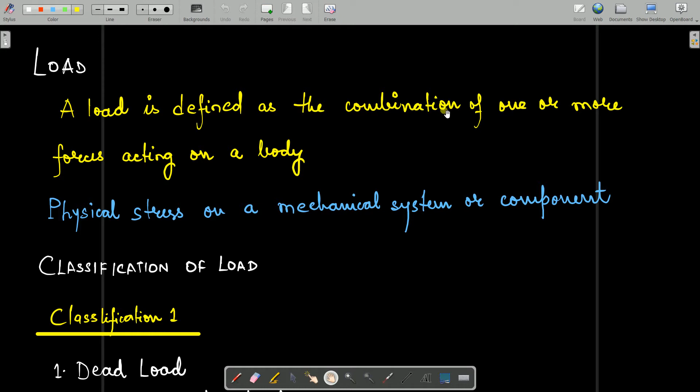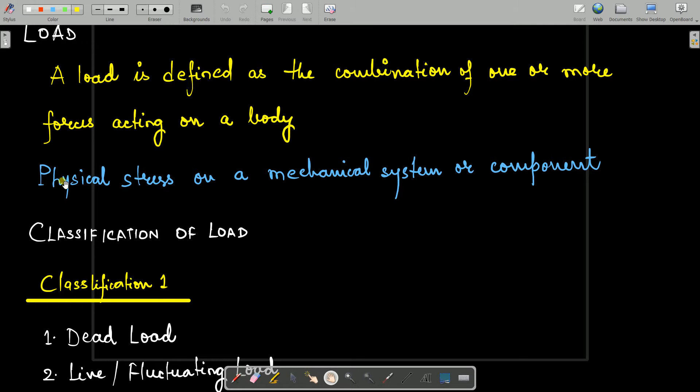Now we'll see what a load is. You can define load as the combination of one or more forces acting on a body. Or in a more trivial sense, a load is nothing but a physical stress on a mechanical system or component. This physical stress is the result of an external force that you're applying on the body.

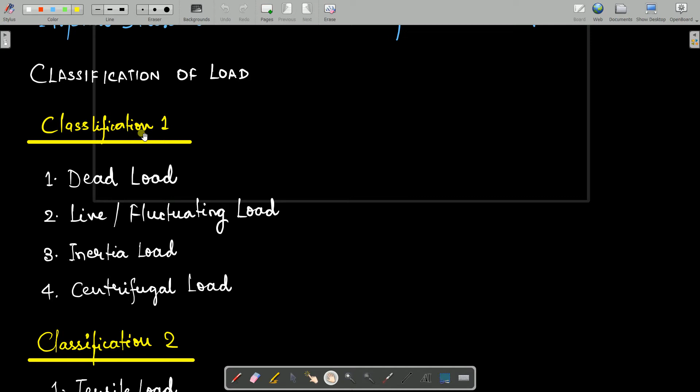Now, classification of load. We can classify load in different ways. The first type of classification is dead load, live or fluctuating load, inertia load, and centrifugal load. What is dead load? Dead load is a load which is stationary, which has got no disturbance. Simply, a load is kept - an external force is being applied and it is left.

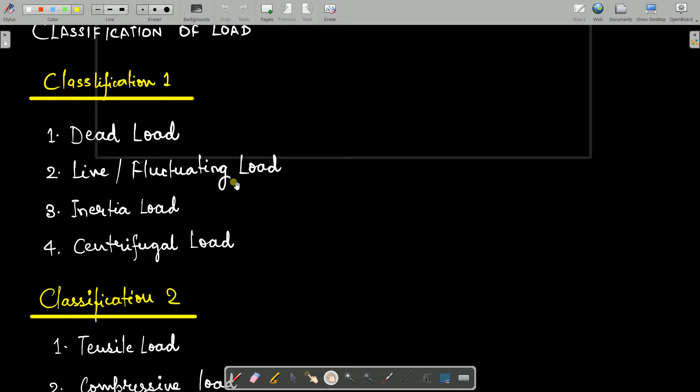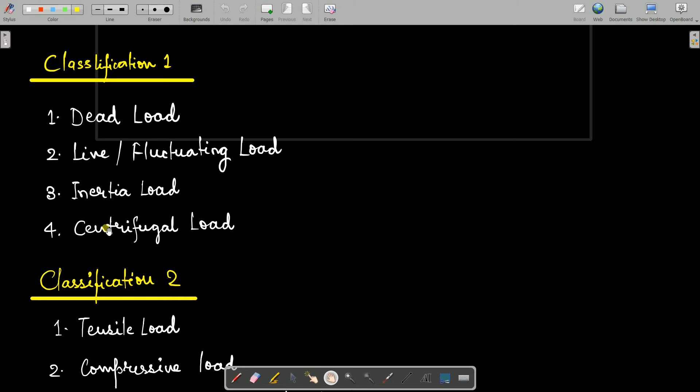Then we have live or fluctuating load. Continuously there are some changes in the magnitude of the load, just like someone hammering something, or some vibrations - those types of loads are called live or fluctuating load. Then we have inertia load, which arises due to inertia. And load arising due to centrifugal force is called centrifugal load. So these four types of load come under classification 1.

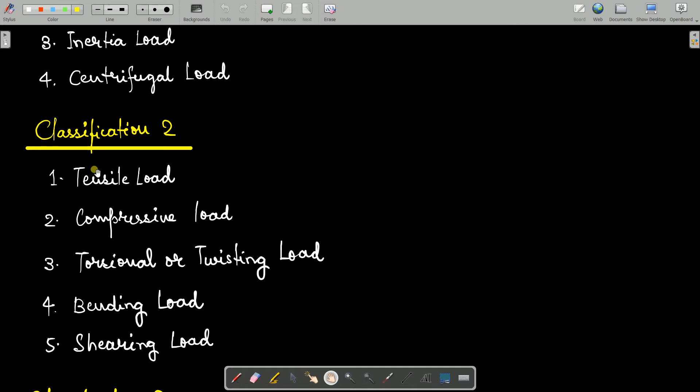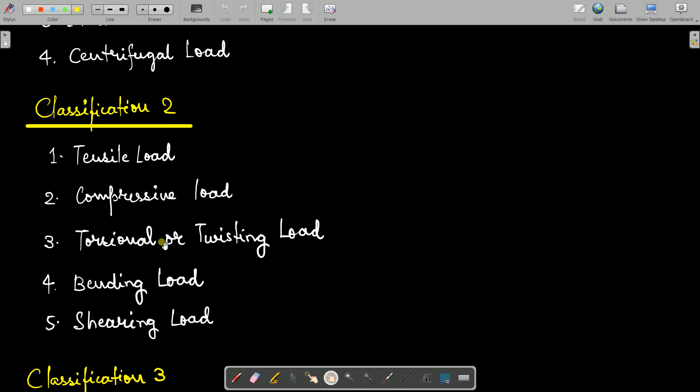Another type of classification: we can classify load as tensile load. Just like if you are pulling anything, when the pulling nature comes into picture, that load is called tensile load. Whenever you are compressing anything, that load is called compressive load. When you are twisting anything, applying some torsion, that is called torsional or twisting load. When you are bending anything, that is called bending load. And when you are shearing anything, we call that shearing load.

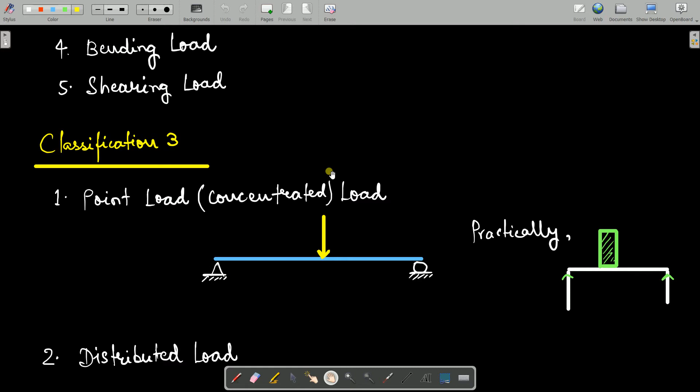The third type of classification is rather very relevant from the strength of materials point of view, so remember it and learn it by heart. I'm giving you the introduction of these different types of loads that we are going to study in our shear force and bending moment diagram, so that you have very good clarity here itself.

So the first type of load is your point load, which is your concentrated load. We represent it with an arrow like this. Forget about the symbol I've used here - this is actually the beam. We will discuss the beam sometime later, but for now focus on these arrows, the loads. The point of focus is the load, not the beam.

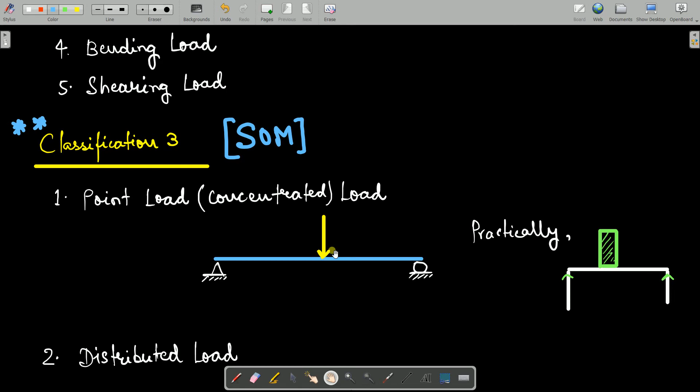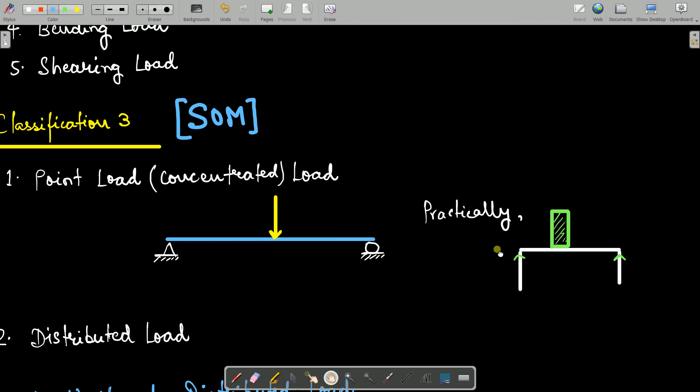Now you will be asking, sir, what is this point load? Practically, is it possible? See, practically you cannot say that a load is being acted at a point - it is actually a relative term. Practically, we call a load a point load whenever the magnitude of the load or the surface area of the load is very small as compared to the base on which it is kept.

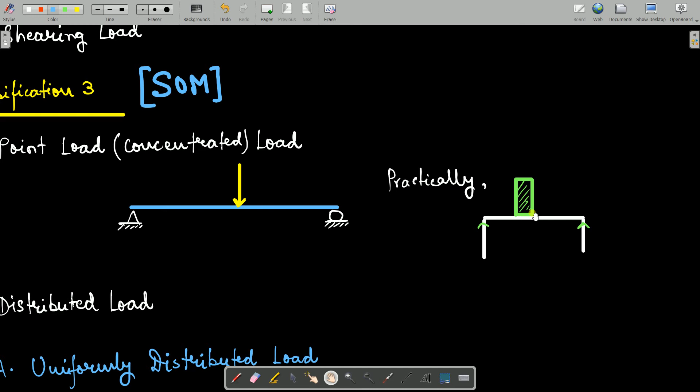So suppose the base is very big or huge - in comparison to that, the surface of this particular load which is kept is negligible. That is why comparatively we call this to be a point load or concentrated load. So there is nothing called a point load that is just like a needle point - there will be no load, of course. This is a comparative term, remember this.

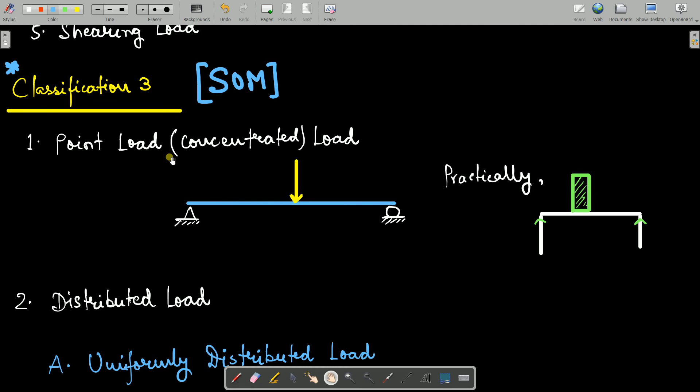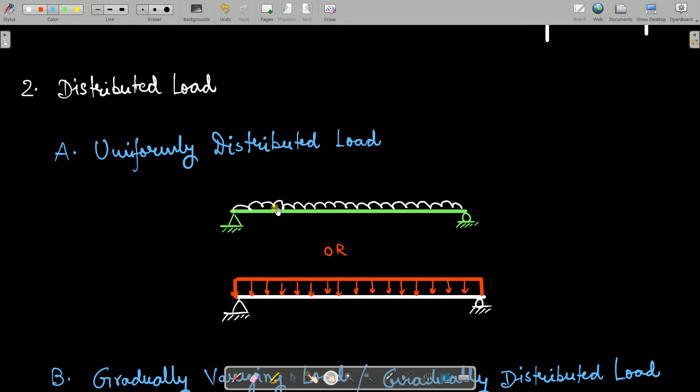Then we have got something called distributed load. Under distributed load, the first category is uniformly distributed load. The symbol or representation of this uniformly distributed load is this, just like some clouds, uniform clouds going on the surface, or you can show it with the help of some rectangles, which is vertically downwards.

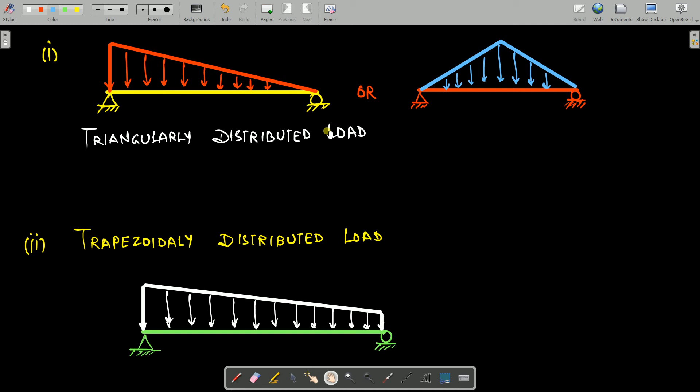Another type of classification of distributed load is your gradually varying load, also called gradually distributed load. Under this category we have further classification: triangularly distributed load and trapezoidally distributed load. Whenever you have something in the form of a triangle, either this triangle or that one, doesn't matter, it is a triangle, so we'll call this triangularly distributed load. And whenever you see a shape like a trapezoid, we'll call this trapezoidally distributed load.

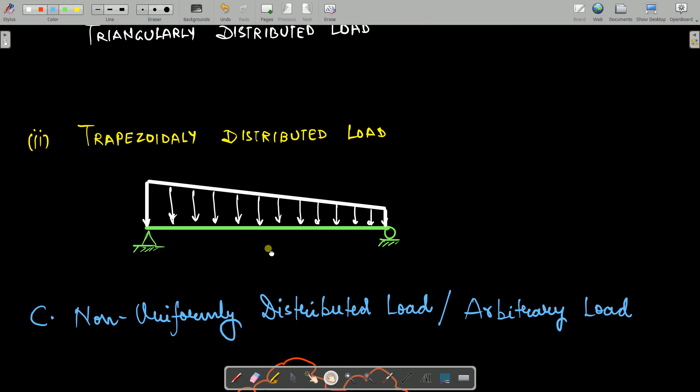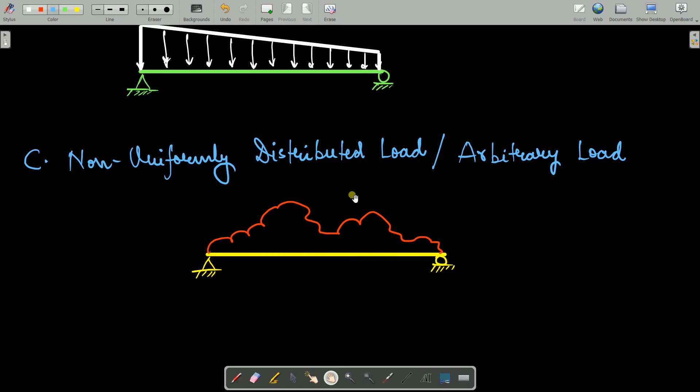The last category we have is non-uniformly distributed load, or your arbitrary load. Here the distribution is not uniform - it could be anything, it could be arbitrary. Generally, practically, most cases you will come across this, but our point of focus and numerical solving area will lie under these categories - that is classification 3.

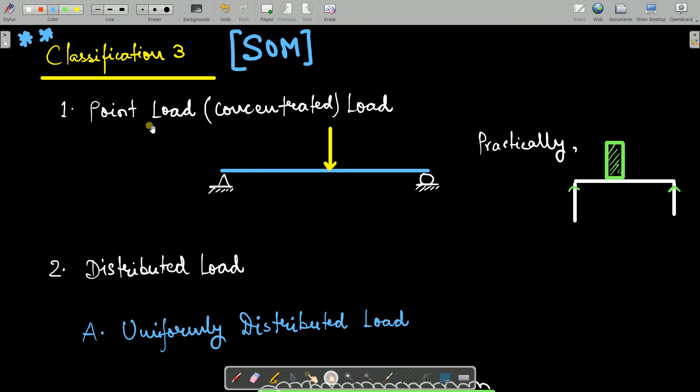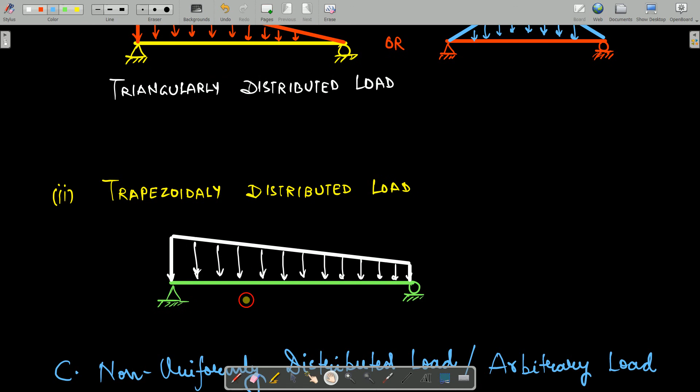That is your first three categories: point load or concentrated load, distributed load which is uniformly distributed, gradually varying or gradually distributed, and then triangularly and trapezoidally. We won't focus more on this - if some question comes, we will see it later. But for the time being, for your exam and undergraduate course, our point of concentration will be under these: point load, distributed load.